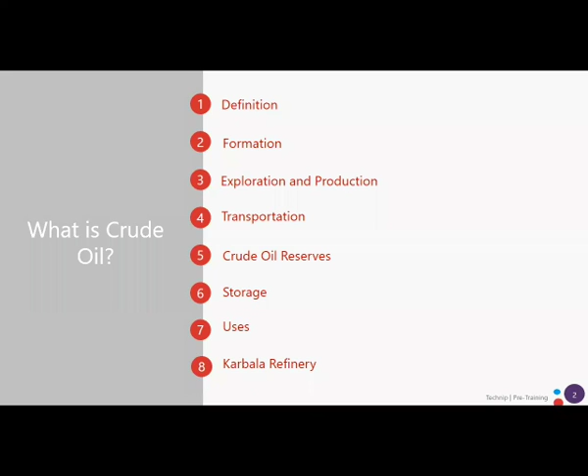Okay, let's start with the definition. Crude oil, commonly known as petroleum, is a liquid found within the earth comprised of hydrocarbons, other organic compounds, and small amounts of metal. The word petroleum comes from the Latin roots petra, meaning rock, and oleum, meaning oil. The crude oil hydrocarbons are mainly hydrogen, about 13% weight, and carbon, about 80%.

Other elements also found in crude oil make life more difficult for the refinery. These other elements are nitrogen, sulfur, oxygen, and metals such as iron, nickel, and copper, which can also be mixed in the hydrocarbons in small amounts.

As you know, organic compounds are those related with carbon and hydrogen, where carbon is present, covalently linked to other atoms.

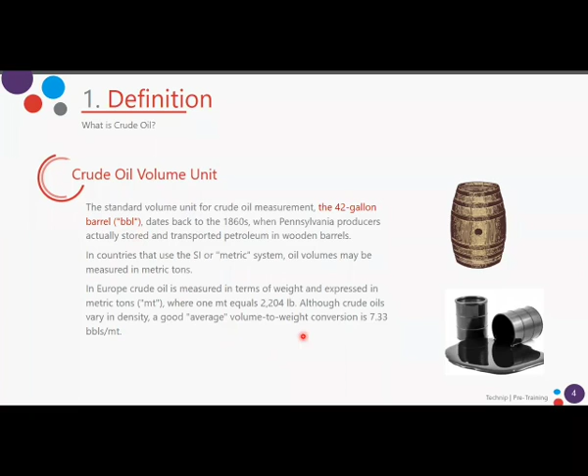Let's talk about some crude oil facts. Crude oil is a naturally occurring fossil fuel, meaning it comes from the remains of dead organisms. As we talked before, crude oil is made up of a mixture of hydrocarbons, hydrogen and carbon atoms. It exists in liquid form in underground reservoirs, in the tiny spaces within sedimentary rocks.

Of course, oil is cleaner than coal, but it also has some disadvantages, like the air pollution created in refining and transportation, and burning gasoline and other petroleum products releases CO2 that contributes to the greenhouse effect and increases global warming. We have also had, on many occasions, oil spills that can cause great environmental damage. So we have to be very aware of the environmental impact of crude oil transportation and refining.

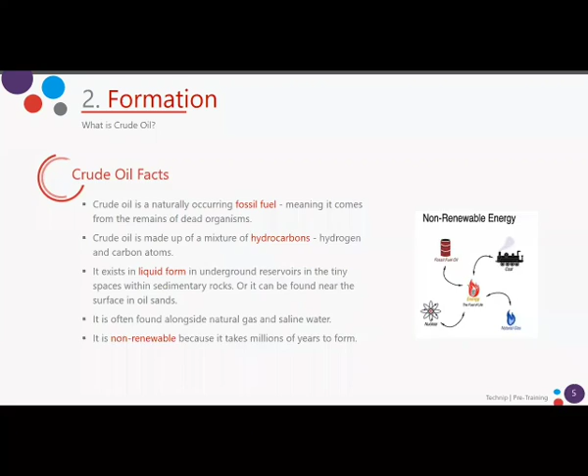How crude oil is formed.

Crude oil is formed from the remains of dead organisms, diatoms such as algae and zooplankton, that existed millions of years ago in a marine environment. These organisms were the dominant form of life on Earth at the time. As they lived, these organisms absorbed energy from the sun and stored it as carbon molecules within their bodies.

Once they died, their remains sank to the bottom of the ocean or riverbeds and were buried in layers of sand, mud, and rock. Over millions of years, the remains were buried deeper and deeper under more sediment and organic material.

The enormous pressure, high temperature, and lack of oxygen transformed the organic matter into a waxy substance called kerogen.

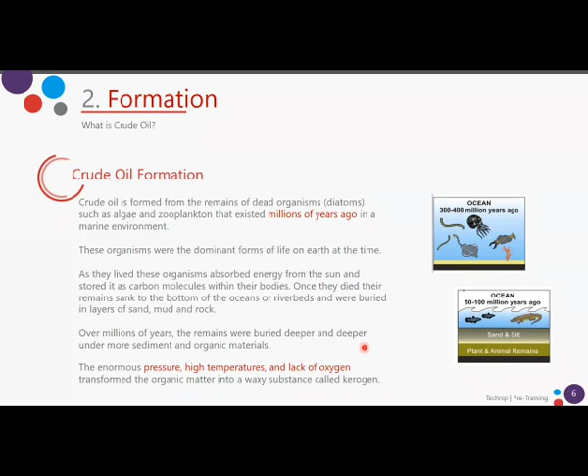With even more heat, pressure, and time, the kerogen, the component we saw in the previous slide, undergoes a process called catagenesis, which transforms the kerogen into hydrocarbons. Catagenesis is a term used in petroleum geology to describe the cracking process: you crack the molecules, resulting in the conversion of organic kerogen into hydrocarbon.

Different combinations of pressure, heat, and the original organic material will determine the type of hydrocarbon formed. In this case, the hydrocarbons form crude oil. If you apply more pressure and more heat, then you get more natural gas.

After the oil is formed, it moves through tiny pores in the surrounding rock from an area of high pressure to low pressure. That movement is often upwards, from the bottom to the top.

Some oil may make it all the way to the surface when it pools without restriction. But in other cases, the oil gets trapped under impermeable layers of rock or clay, where it forms an underground reservoir. So there can be a free path for the oil, or the oil can get trapped in underground reservoirs.

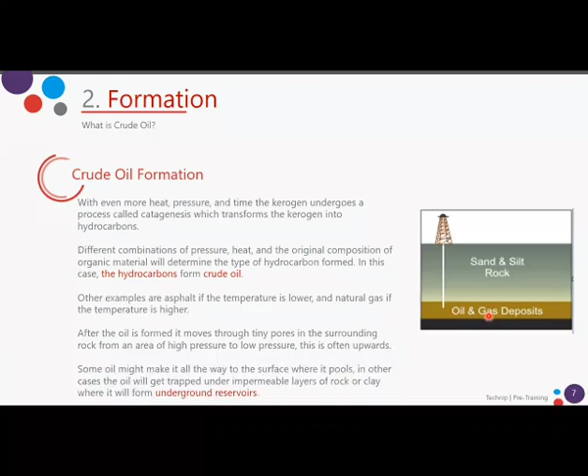So let's talk a little bit about exploration and production. Of course this is a complete subject, very specific, that requires a lot of study and understanding. We will give here some brief concepts of exploration and production.

The definition is that exploration and production is the early stage of energy production, which includes searching for and extracting oil and gas. In the oil and gas sector, this stage is referred to as upstream. Then we have the midstream and downstream sectors.

Land surveys are performed to locate specific minerals underground in order to estimate the amount of oil and gas reserved before drilling.

There are several processes involved, but one of the processes that can be used involves seismology. This process uses substantial vibration, as a result of machinery or explosives, to create seismic waves. Through these seismic waves, they can find the reservoir location.

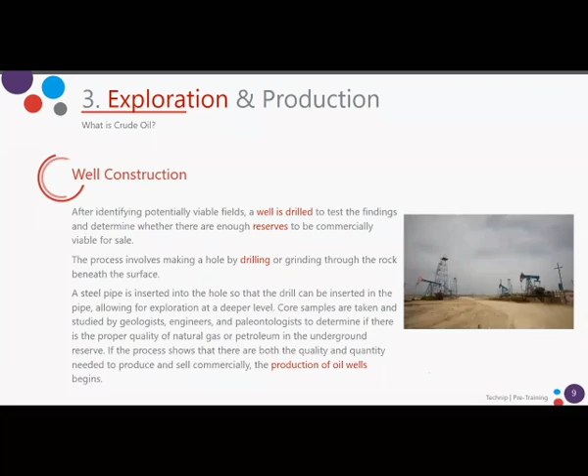How do they construct the well? Engineers will typically estimate how many wells will be needed and the best method of extraction. The estimated cost of the number of wells is determined. Next, the construction of the platform begins. This can be land or offshore.

The necessary environmental protections are also implemented at this stage. Through all these years, there have been significant advances in drilling technologies.

Companies can also drill horizontally, tapping into vertical wells to search for natural gas pockets, which can produce more natural gas than a typical vertical well.

Although they are very useful, horizontal drilling is about 3 times more expensive than vertical drilling. However, this extra cost is generally made up for with the increased well production. So depending on the crude oil price, companies will go to this more expensive process, that is the horizontal drilling.

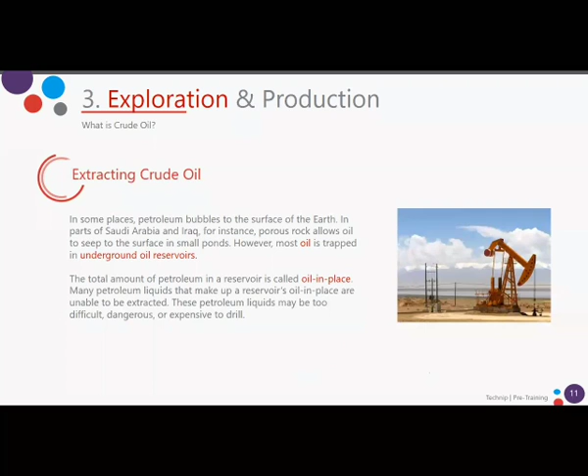The part of a reservoir's oil in place that can be extracted and refined is the oil reserve. So it's different from the oil in place.

The decision to invest in complex drilling operations is often made based on a site's proven oil reserve. So we can see that oil in place must not be confused with oil reserve. The oil reserve is the technically and economically recoverable portion of oil volume in the reservoir.

We will see in the next slides the recovery techniques that will be used to recover this oil in the underground reservoir.

On land, oil can be drilled with an apparatus called an oil rig or drilling rig. Offshore, oil is drilled from an oil platform. So first, a crude oil well is created by drilling a hole into the earth with an oil rig. A steel pipe is placed inside the oil well for structural strength.

Then holes are made at the bottom of the well so oil passes through the base. Collection valves are fitted at the top, and these valves maintain pressure when crude oil is pumped.

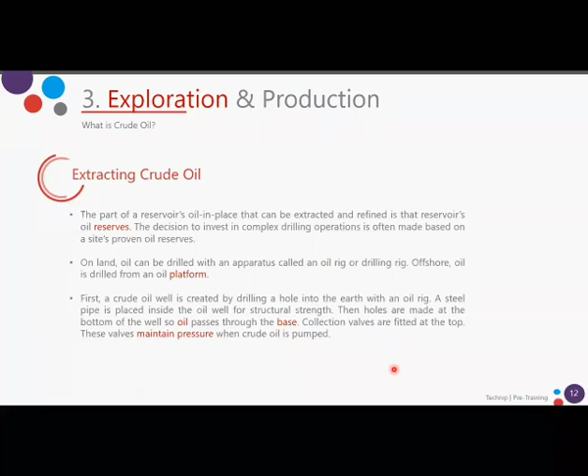So let's talk about the process for the recovery of the crude oil. We have mainly three: primary, secondary, and tertiary recovery. The primary recovery is the first stage of petroleum and gas production. The crude oil extraction from a new well relies on the natural rise of the oil due to the pressure differences between the oil field and the bottom hole of the well.

You can also use mechanical lift systems like a rod pump, which is also called primary recovery. In this stage, with primary recovery, you can get between 5 to 15% of the oil in the reservoir. So primary recovery is natural flow and also artificial lift, which is called pumps.

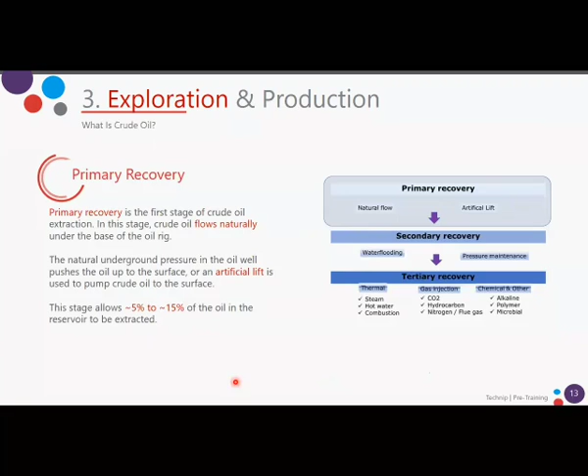The secondary recovery is used after we have recovered all the crude that we can with the primary recovery. So a secondary recovery will be used. How do we increase the natural flow of the oil? We can increase the natural flow by increasing the reservoir pressure. How do we increase the pressure? By injecting water or natural gas into the well. So this is what we call secondary recovery, to increase pressure with water or with natural gas.

How much crude can we recover in this secondary recovery? Up to between 35 to 45% of the oil in the reservoir. So secondary recovery is based on increasing the reservoir pressure.

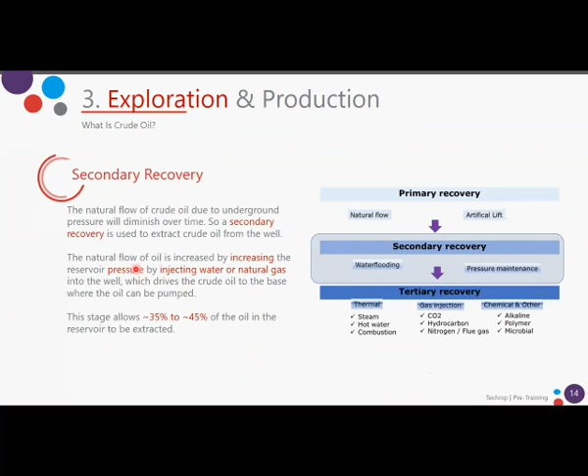What is a tertiary recovery? Tertiary recovery is applied when crude oil extraction from secondary recovery becomes impossible.

In this process, water, gas, and chemicals are injected into the reservoir to improve the natural flow of crude oil, and finally the crude oil is extracted. This stage allows an extra 5 to 15% of the oil in the reservoir to be extracted. Of course, tertiary recovery is more expensive than the other two processes, so when crude oil prices are high, this process can be used to increase oil extraction.

The primary purpose of this tertiary oil recovery is to reduce the oil viscosity. So we can go to this process of increasing or decreasing the viscosity with these processes.

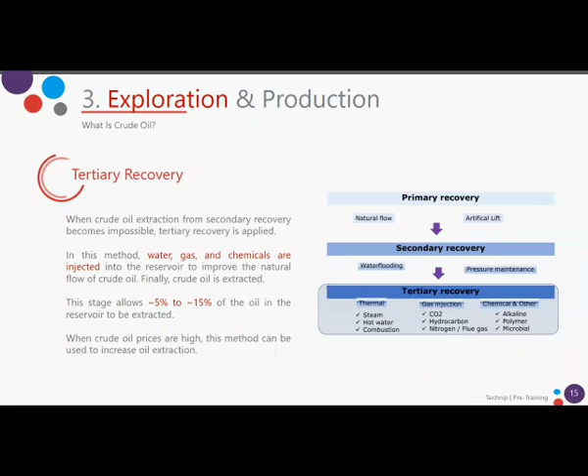The fluid that we get from the well is a combination of crude oil and natural gas. It is often mixed with water, non-hydrocarbon gases, and other impurities. The natural gas that we get along with the crude oil is called associated natural gas, because it comes with the oil.

The first step in processing this fluid is to route it to centralized surface handling facilities, where vessels are used to separate the oil, water, and gas into individual streams.

The water that we get is usually pumped back to the reservoir. If we cannot pump it back to the reservoir, we dispose of it in an environmentally friendly manner.

The oil that we get is measured and stored in tanks, then transported by pipeline or tank to the point of sale. The oil from the well is stored and then sent to refineries for further processing. The gas is treated or conditioned to remove water, vapor, and other impurities, and processed to recover gas liquids before being metered and sold.

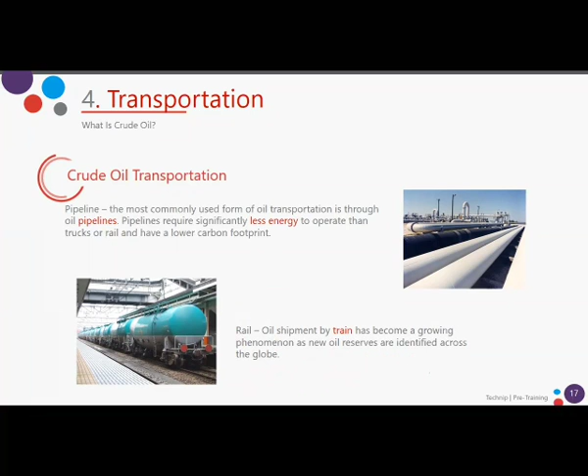Also, we can transport crude oil by truck, but this is limited by storage capacity. However, trucks have great flexibility in reaching all destinations.

But of course, the cheapest way to transport crude oil is by ship, where you can transport very large amounts. If we compare a barge, which is like a small tanker with 30,000 barrel capacity, it can carry the equivalent of 45 rail tanks at about one third the cost. So it is the most economical way to transport.

Nowadays, tankers can carry up to 2 million barrels of crude oil. If you multiply that by crude oil prices, they carry very expensive material inside each tank when transporting these very big quantities of crude oil.

So we have seen that we can transport crude oil in four ways: by pipeline, which is more used when transporting crude oil within a country or with neighboring countries; by train; by truck; or by ship.

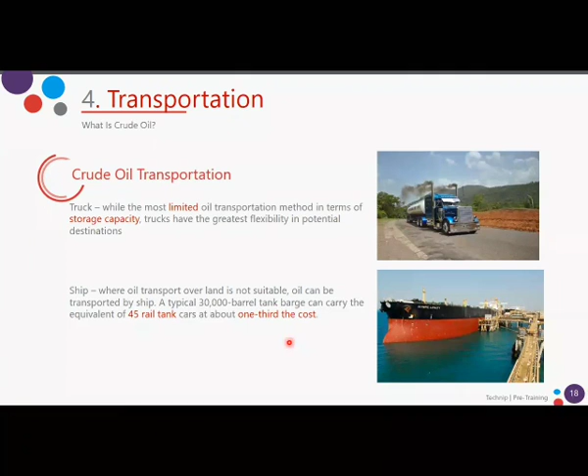Let's talk a little bit about crude oil reserves. For this, we have to talk about OPEC, the Organization of the Petroleum Exporting Countries. It was created at the Baghdad Conference in September 1960 by Iran, Iraq, Kuwait, Saudi Arabia, and Venezuela.

The mission of OPEC is to coordinate and unify the petroleum policies of its member countries and ensure the stabilization of oil markets in order to secure three things: an efficient, economic, and regular supply of petroleum to consumers; a steady income to producers; and a fair return on capital for those investing in the petroleum industry.

The crude oil reserves: all continents have oil and natural gas reserves, although they are very unevenly distributed. In the Middle East, there are huge oil fields with half of the world reserve. In the Gulf of Mexico, the North Sea, and in the Arctic, both Alaska and Russia, there are also large reserves.

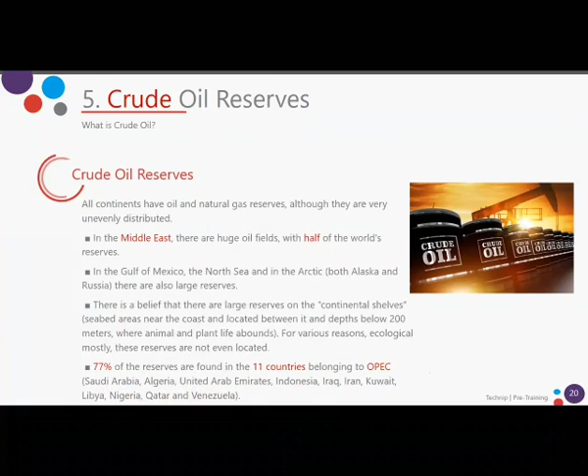Okay, so the oil reserve - remember that this is the amount of crude oil that can be technically recovered at a cost that is financially feasible at the present price of oil. That is different from the oil in place that we saw before, which is the total amount foreseen to be in the crude oil well that we are evaluating. So the reserves will change with the price.

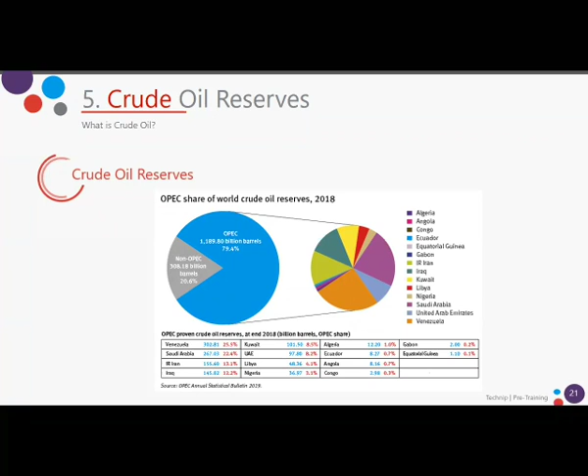Now we will see how do we store the crude oil. The crude oil, untreated and unrefined, is stored in tanks for shipment to other locations or processing into finished product.

There are four basic types of tanks used to store petroleum products. We have the floating roof tank used for crude oil, gasoline, and naphtha. Also we have the fixed roof tank that we use for diesel, kerosene, catalytic cracker feedstock, and residual fuel oil. The bullet tank used mainly for normal butane, propane, or propylene, and the spherical tank used for isobutane and normal butane.

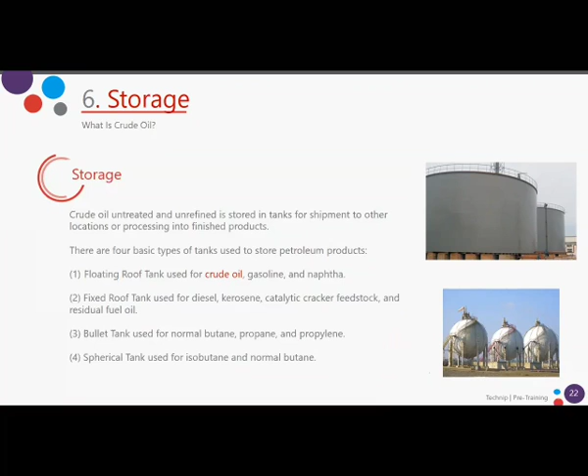How do we use the crude oil? To be used by us, the crude oil must be fractionated into its various hydrocarbons, and this is done at the refinery. Oil can be used in many different products because of its composition of many different hydrocarbons of different sizes, which are individually useful in different ways due to their different properties. So the purpose of a refinery is to separate and purify these different components.

Most refinery products can be grouped into three classes: the light distillates, that is naphtha and gasoline; the middle distillates, kerosene and diesel; and the heavy distillates, fuel oil, lubricating oil, waxes, and tar.

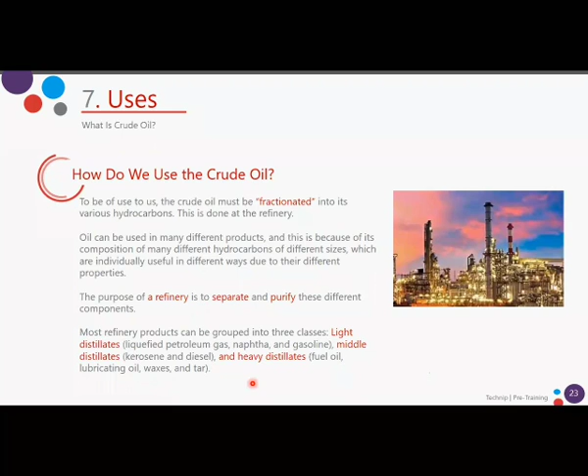How do we get from here to here? Through different processes. The main processes are the separation and the conversion, treatment, and then blending of the product to get the final product specification. How do we get all the processes? With the assistance of heat, pressure, catalysts, and additives.

During the next online sessions, we will see all the processes involved in the refinery. We will see the separation, mainly the crude oil distillation - the atmospheric and the vacuum distillation. Then we will see the conversion, where you have the isomerization, the catalytic reformer, the fluid catalytic cracking. So you have a lot of processes that we will see in the next session classes.

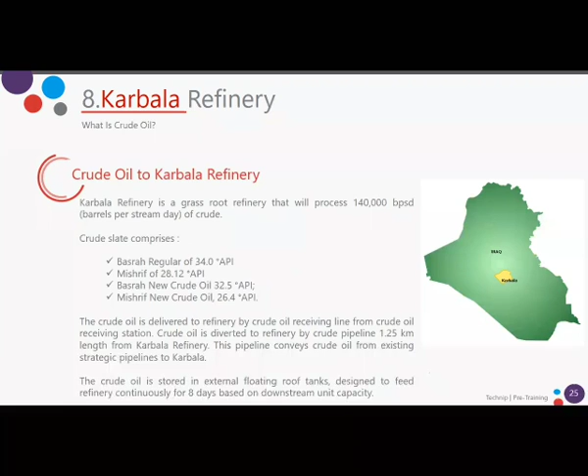Each refinery has a proper scheme depending on the products that you would like to get. In the case of the Karbala refinery, the production target is mainly transportation fuels for the Iraqi market. Also, some heavy fuel oil will be produced for the Al Khairat power station, and other products will be bitumen and solid sulfur.

The solid sulfur is because, as we saw in the second slide, the crude oil is composed mainly of hydrocarbons, but of course crude oil also contains some sulfur, and this sulfur has to be removed prior to going to a conversion process, and this is finally converted to solid sulfur.

The Karbala refinery configuration is comparable to a medium conversion scheme based on vacuum gas oil treatment and fluid catalytic cracking technologies, with the objective to obtain a significant conversion of heavy materials into desulfurized gasoline as secondary distillate. But as I told you, we will see later in different sessions all these process units, the main characteristics, and the feedstock and the products you will get from each process unit.

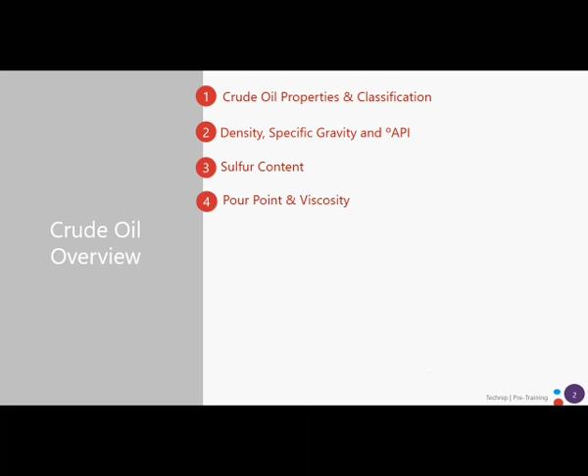So welcome again. Now we are going to go through the second presentation, the crude oil overview. In this presentation we will talk about crude oil properties and classification, density, specific gravity and degrees API, sulfur content, pour point and viscosity, basic sediment and water, ash content and carbon residue, total acid number, total nitrogen, and asphaltenes.

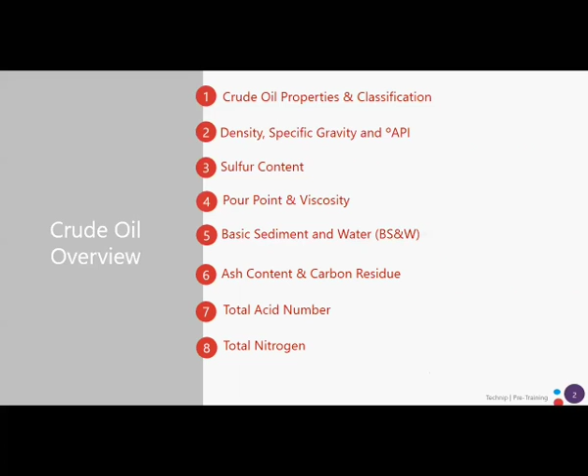It is important, if we are going to process crude oil, to understand its basic properties, the key raw material processed in the refinery. Crude oils are not the same, but vary in color, composition, and consistency. As we saw in the previous presentation, the Karbala refinery crude slate comprises four types of crude oil: two from Basra, one with 34 degrees API, and Basrah new crude with 32.5. We also have crude oil from Mishrif with 28.12, and a new crude oil with 26.4. Oil is classified according to three main categories: geographic location, API gravity, and sulfur content.

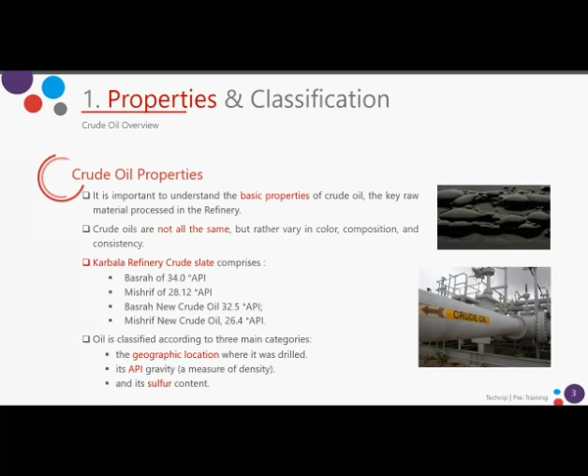So we will talk about many of these properties of crude oil. These are some of the basic properties of crude oil that will be treated in the Karbala refinery, which I took from the operating manual of the crude oil and vacuum distillation unit. So we will see the identification of the crude oils: specific gravity, API gravity, sulfur, pour point, basic sediment and water, ash content, asphaltenes, kinematic viscosity at two temperatures, total nitrogen, total acid number, and carbon residue.

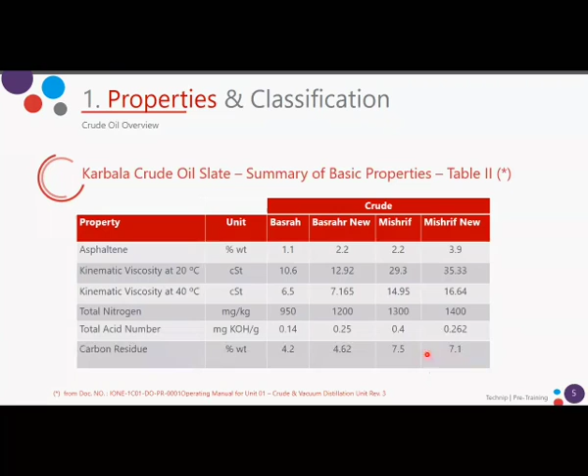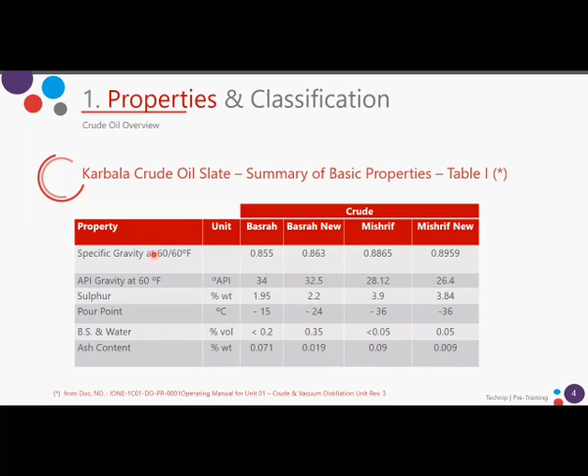You will have here the values for the four cases of crude oils to be processed in the refinery. Here you have the specific gravity for the four crude oils. The idea of this presentation is that we will go through all these properties to explain the concept of each one.

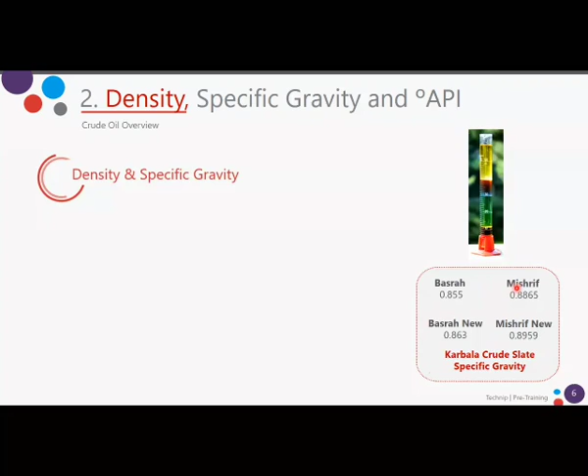So we will start with density and specific gravity. In this small square you will have the specific gravity for the crude oils to be treated in the refinery. The density is defined as mass per unit volume of a fluid and is shown by rho. The SI unit for density is kilogram per cubic meter. Liquid density decreases as temperature increases, but the effect of pressure on liquid density at moderate pressure is usually negligible, unlike in gases.

Two liquid density related properties of oils are often used: specific gravity and API gravity. What is specific gravity? It is an index used to measure the density of a liquid, calculated as a ratio — the density of the liquid divided by the density of water. Specific gravity, because it is a ratio of two equal dimension quantities, is a dimensionless quantity.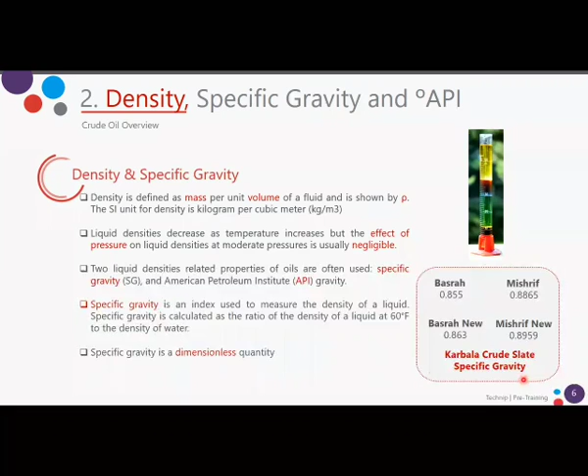You saw here the specific gravity is 0.855, without any dimension. Liquids with a density lower than water, which includes most crude oil grades and petroleum products, will have a specific gravity between 0 and 1. It is important to remember these concepts, because we will use specific gravity to calculate the API degrees. So remember, specific gravity is a ratio between the density of the crude oil, or any liquid, divided by the density of water at a reference temperature.

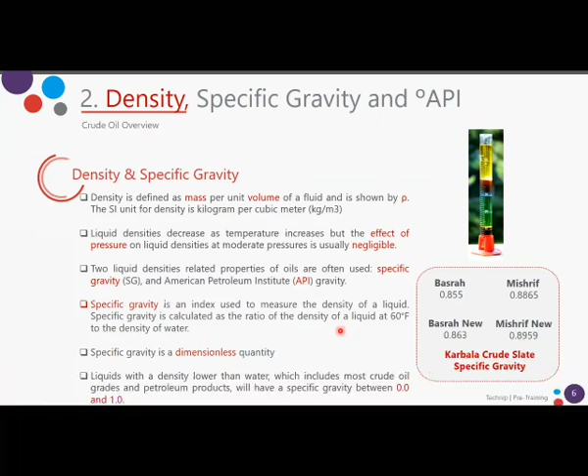So what is the API degrees? The American Petroleum Institute gravity, or API gravity, is a measure of how heavy or light a petroleum liquid is compared to water. If its API gravity is greater than 10, it is lighter and floats on water; if it's less than 10, it is heavier and sinks. API, the American Petroleum Institute, is a trade association of firms engaged in all aspects of the U.S. petroleum industry, including producers, refiners, marketers, and transporters.

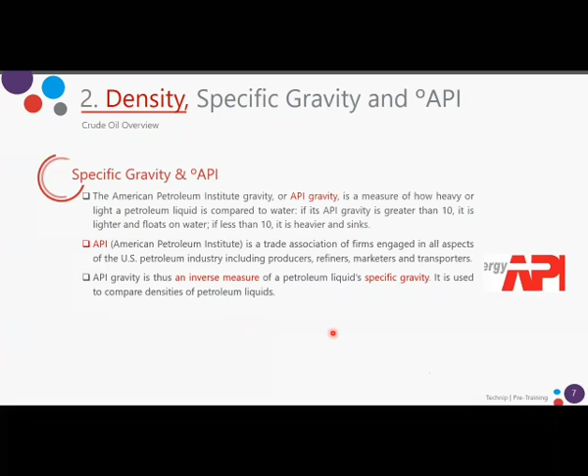API gravity is a little bit tricky because it's an inverse measure of the petroleum liquid specific gravity, and it is used to compare density of petroleum liquids. Although API gravity, as we will see in the formula, is mathematically a dimensionless quantity, it is often referred to as being in degrees.

So the formula to calculate the API gravity from a specific gravity is the following: 141.5 divided by the specific gravity, minus 131.5.

If we put here, for example, the specific gravity of water, that is 1, because it's the density divided by the density of water, that is 1, so we will get 10. So the API gravity of water would be 10: 141.5 minus 131.5.

As you can see, if you have a lower number here, you will have a higher number here, and this is a higher number. That's why it's the inverse. You have a low specific gravity, you have a higher API gravity. So oils with low densities, and hence low specific gravity, have high API gravity.

The price of a crude oil is usually based on its API gravity. With a high API gravity, that means you have a light crude oil, and it commands a higher price because it can produce a greater quantity of light products in the refining processes, and these light products have a higher price in the market. That's why a light crude oil will always be more expensive than a heavy crude oil.

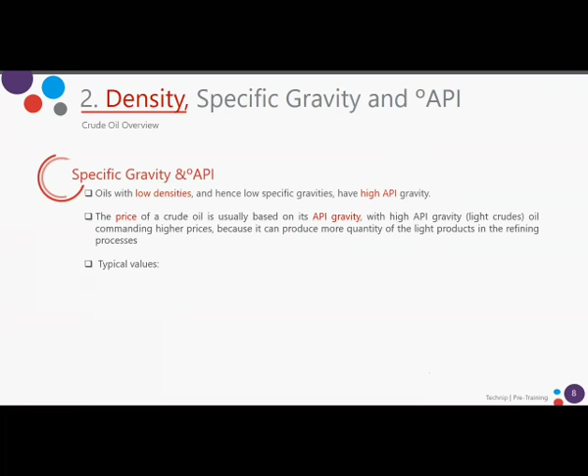Looking at typical values for different substances: water has a specific gravity of 1, giving an API gravity of 10 degrees. Gasoline usually has a specific gravity of 0.74, giving an API gravity of 60. For a light crude, the specific gravity is more or less 0.84, giving 36 degrees. But for a heavy crude, the specific gravity is 0.95, giving an API gravity of 18. So you will see that a light crude has a higher API gravity than a heavy crude, so for lower specific gravity, higher API gravities.

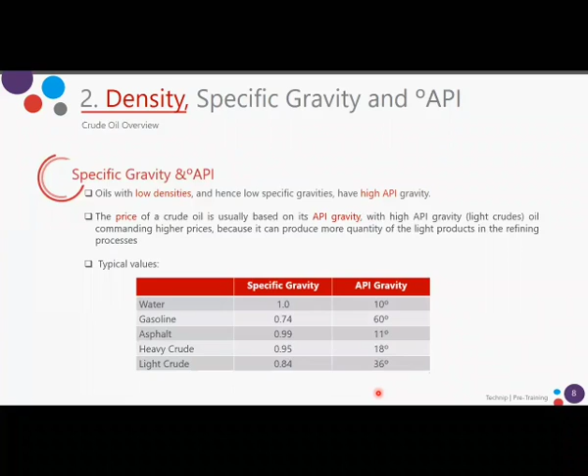The crude oils are classified according to the degrees API. Let's see how they are classified: they are light crude oil if the API gravity is higher than 31.1. They are medium oil if the API gravity is between 22.3 and 31.1. There are heavy crude oil if the API gravity is below 22.3, and extra heavy has a gravity below 10 degrees. Here we have the API for the crudes that will be treated in the refinery.

We have the Basrah crude with API degrees higher than 31.1, so it is classified as light crude oil. And we have the Mishrif crude oil where the API gravity is between 22 and 31.1, so it's classified as a medium crude oil. You will see here the classification in an arrow: light, medium, heavy, and extra heavy according to these values. So it is always good to remember that for light crude oil, the API gravity is higher than 31.1.

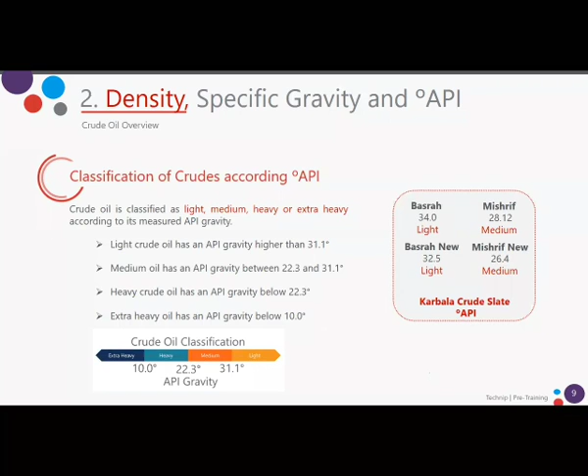Now we will see another very important element in the crude oil, that is sulfur. The sulfur content is quite important in the classification of crude oils. Why? Because it's not good in the crude oil, so we have to extract this sulfur because when burned, it will generate sulfur oxide. That's why it's an undesirable contaminant in the crude oil and in petroleum products.

When sulfur dioxide is created in the combustion of sulfur, and this sulfur dioxide combines with water and air, it forms sulfuric acid, which is the main component of acid rain. As you know, acid rain can cause deforestation, can acidify waterways to the detriment of aquatic life, and corrodes building materials and paints.

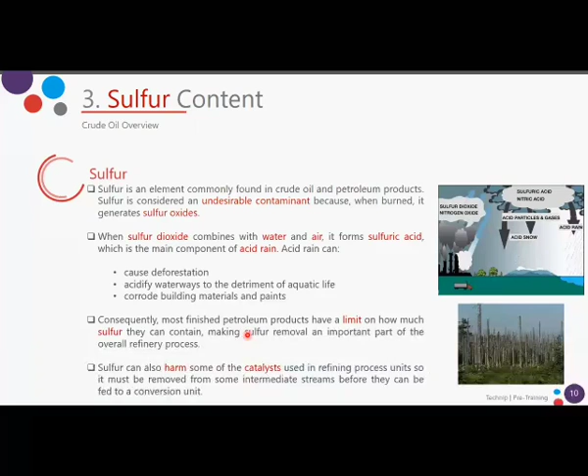How do we classify the crudes according to sulfur content? As we saw, sulfur in the crude oil is the second most important property next to the API. There are two terms to classify crude oil according to sulfur content: sweet and sour. These refer to the sulfur content of crude oil.

It seems that early prospectors would taste oil to determine its quality, and low sulfur oil actually tasted sweet. That's why they're classified as sweet and sour.

Using sulfur content to classify the crude, we say the crude is sweet if the sulfur content is less than 0.5% weight, and sour if the sulfur content is greater than 0.5% weight.

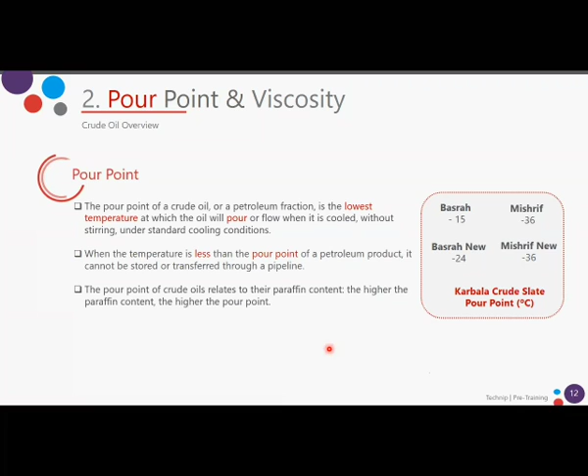Let's talk now about viscosity. The viscosity of a liquid is a measure of its resistance to flow. The viscosity symbol is mu. Water, gasoline, and other liquids that flow freely have a low viscosity.

Compared with honey, syrup, motor oil, and other liquids that don't flow freely, these have a high viscosity. The most commonly used unit for this dynamic or absolute viscosity is the centipoise.

The power requirement to transport a fluid depends strongly on viscosity. So how does viscosity vary with temperature? The viscosity of a liquid decreases with increasing temperature. But for gases, the viscosity increases with increasing temperature, unlike in liquids.

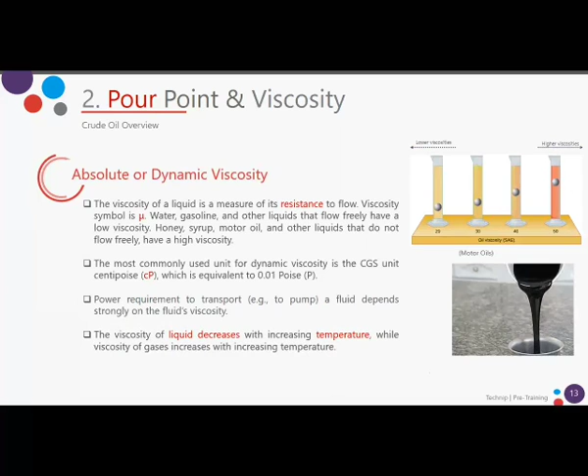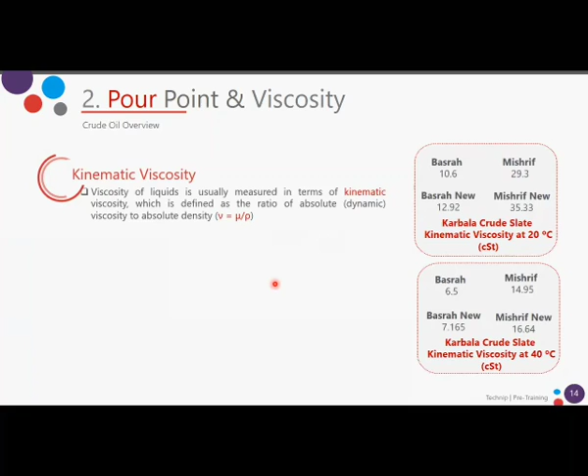So this is the dynamic viscosity, but we also see the viscosity expressed as the kinematic viscosity. The kinematic viscosity is usually the ratio between the absolute or dynamic viscosity that we saw in the previous slide divided by the density of the liquid. Often the unit used for the kinematic viscosity is the centistoke.

Usually, the values of the kinematic viscosity are reported at two reference temperatures. This measure of viscosity and kinematic viscosity are used frequently in engineering, fluid dynamics, and for practical applications.

Okay, I will raise my voice. Okay.

This measure of viscosity and kinematic viscosity is used frequently in engineering fluid dynamics and has very practical applications through pipelines. When you calculate the pipeline, this is common data you will have to use: the viscosity will tell you also the pressure drop across the pipelines.

Here you will see the kinematic viscosity for the crudes in the refinery. As you can see, they are referred to two temperatures, at 20 degrees and at 40 degrees, in centistoke, as we saw previously, which is a common unit used. What can you see here about this kinematic viscosity at two temperatures?

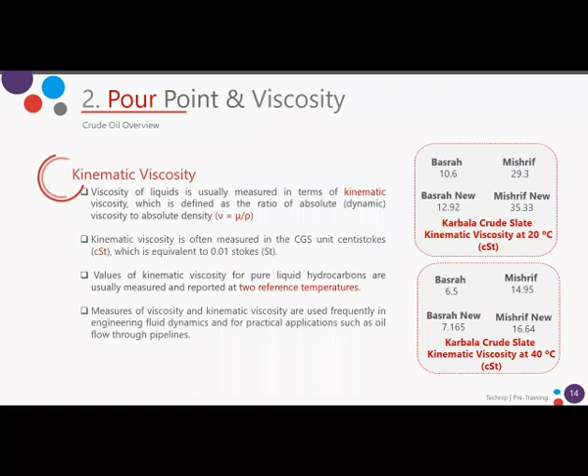Another important property of the crude oil is the basic sediment and water, BS&W. The amount of water, salts, and sediment in the crude oil as received at the petroleum refinery varies widely with the source of the crude oil, the prior processing of the crude oil at the source sites, and with the mode of transporting the crude oil from its source.

The bulk of the water and sediment is usually separated at the field, because they don't want to transport water to the refinery, to minimize the quantity that needs to be transported further. The residual content of this unwanted impurity is measured as BSW, that's basic sediment and water.

Crude oil at the refinery requires desalting to minimize fouling and corrosion caused by salt deposition on heat transfer surfaces and acid formed by the decomposition of the chloride salts, and to remove suspended solids from the crude oil itself.

We will see in the next online session, next week, when we talk about crude oil distillation, this first section of the unit, which is the desalting of the crude oil. That is accomplished before the crude oil distillation, and in this first section we will remove all these, especially the chloride salts present in the crude oil. So it is quite important in the refinery, this first process.

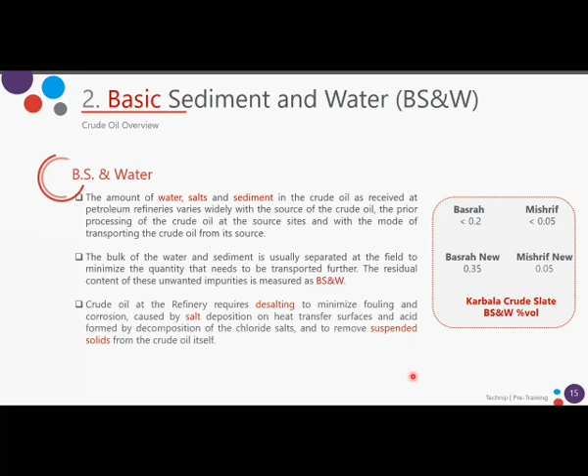Another important property of the crude oil is the ash content. The ash content represents the incombustible component remaining after a sample of the furnace oil is completely burned. The ash content in the crude oil is an indication of its metallic constituents. The ash left after completely burning an oil sample consists of stable metallic salts, metal oxides, and silicon oxides. So it will give you an indication of the metal contents in the crude oil.

Some of the ash forming constituents occur naturally in the crude oil. Others are present as a result of refining or contamination during storage or distribution. So we can have metals in the crude oil, or they can also be picked up in the storage tanks.

The presence of ash in the crude oil, which is an indirect measurement of the metal content in the crude oil, is unfavorable because these metallic compounds cause corrosion and poison the catalyst that we will use in the refinery processes. The higher the ash content is, the higher the tendency of the crude oil to form sludge or sediment. So this ash content is also quite important.

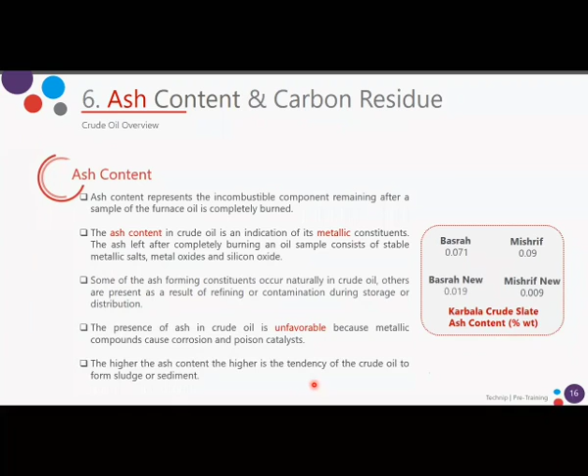Now we will see the carbon residue. The carbon residue, for a fossil fuel, can be defined as the tendency to form carbon deposits, in this case at high temperature in an inert atmosphere.

Carbon residue for a fuel is measured in weight percentage, or parts per million by weight, milligrams per kilogram. Carbon residue relates to the asphalt content of oil and indicates the tendency of fouling in heated tubes and catalyst deactivation. The ash-forming constituents are also part of this total carbon residue.

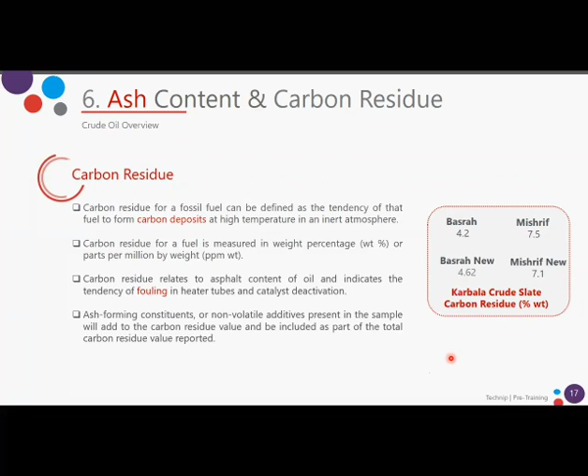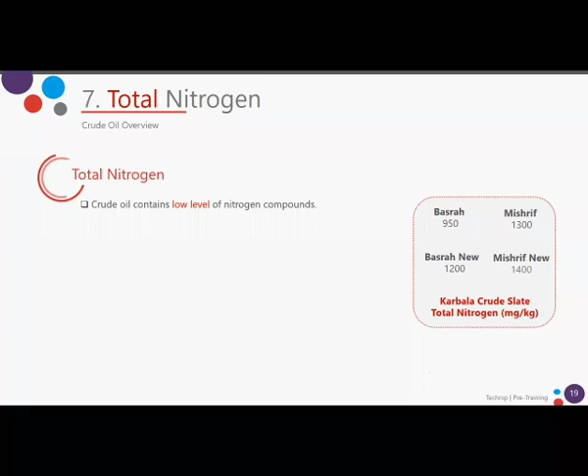Another important parameter to evaluate in the crude oil is the total nitrogen. Normally the crude oil contains a low level of nitrogen compounds compared to the sulfur compounds. We are talking about milligrams per kilogram, so we are talking about ppm.

A high nitrogen content is undesirable because nitrogen compounds can cause severe poisoning of the catalyst used in the refinery. You have seen that catalysts are referred to in all these processes because we have a lot of catalysts in the refinery and they are quite expensive, so we have to take care of them. The nitrogen compounds can also cause corrosion problems, hydrogen blistering, and gum formation in refinery products.

This hydrogen blistering refers to the formation of surface planar cavities called hydrogen blisters in a metal. These result from excessive internal high hydrogen pressure, and this is caused by nitrogen compounds.

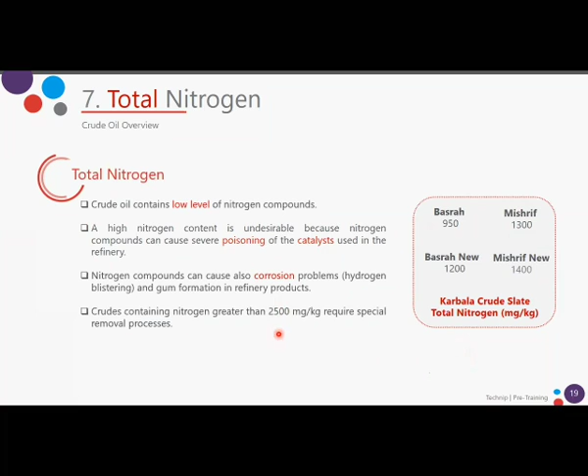Crudes containing nitrogen greater than 2,500 milligrams per kilogram require a special removal process. In our case, the content of nitrogen in the crude oils that will be processed in the Karbala refinery is lower than 2,500.

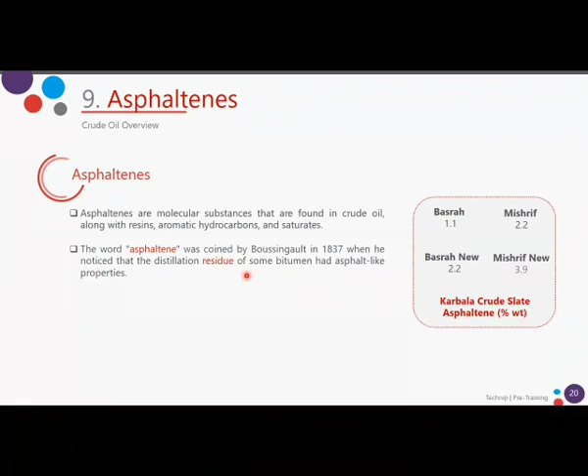Now we will talk about the asphaltenes. The asphaltenes are molecular substances that are found in the crude oil along with resins, aromatic hydrocarbons, and saturates. The word asphaltene was coined by Boussingault in 1837 when he noticed that the distillation residue of some bitumen had asphalt-like properties.

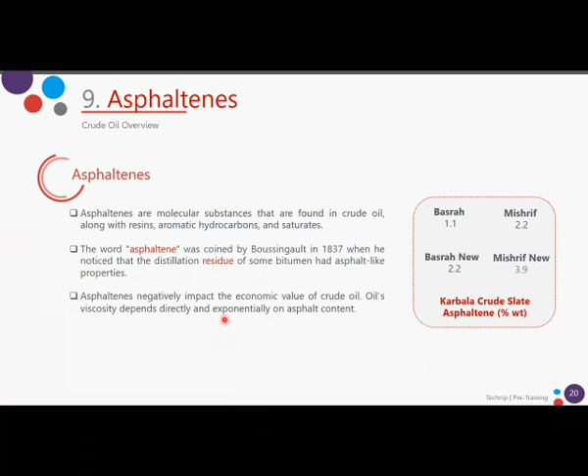The asphaltenes negatively impact the economic value of the crude oil. An oil's viscosity depends directly and exponentially on asphaltene content. I can tell you the asphaltene is a very complicated molecule, a complex structure.

They consist of hydrogen, carbon, nitrogen, oxygen, and sulfur, and these are polynuclear aromatic structures consisting of 20 or more aromatic rings, along with paraffinic or naphthenic chains.

As asphaltene content increases, the viscosity and density also increase. The asphaltenes are known to be one of the largest causes of fouling in the heat exchangers of the crude oil distillation preheat train.

We will see in the next session this preheat train and the importance of the preheat train in the refinery for lower energy consumption. So this is the last slide for this presentation. If you have any question, otherwise we will move to the last presentation, called hydrocarbons.

Okay, so now we will start our last presentation for today, that is hydrocarbons. I'm sure many of the concepts will be very familiar to you, but we'll make a refreshment of these concepts. In this presentation we will see the hydrocarbon definition, we will talk about the carbon atom, the hydrocarbons classification, the hydrocarbons in crude oil, and some examples of non-hydrocarbon compounds.

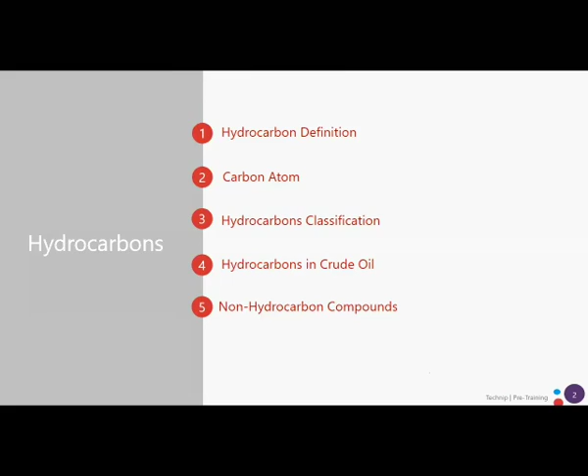Definition: hydrocarbons are the simplest of all organic compounds, containing only carbon and hydrogen. The carbon atoms join together to form the framework of the compound, and the hydrogen atoms attach to them in many different configurations. Hydrocarbons are the principal constituents of crude oil and natural gas. They serve as fuels and lubricants, as well as raw material for the production of plastics, fibers, rubbers, solvents, explosives, and industrial chemicals.

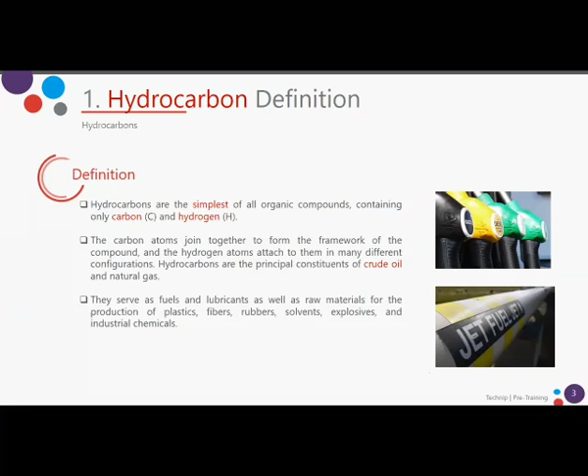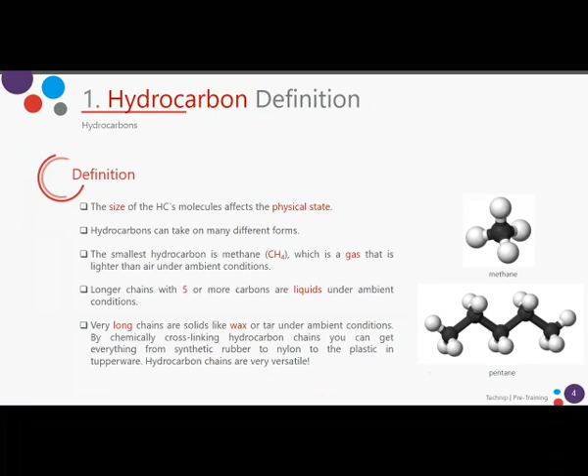It's quite important to know the definition of hydrocarbons, because from hydrocarbons there is a huge industry behind them. So let's talk about carbon, the king of organic chemistry. The carbon atom is unique among elements in its tendency to form extensive networks of covalent bonds, not only with other elements, but also with itself.

As you saw the other day when you talked about the periodic table, carbon is neither an electropositive nor an electronegative element, so it's more likely to share electrons than to gain or lose them. That's the tendency to form covalent bonds. The carbon-hydrogen bond, the CH bond, is a covalent bond, meaning carbon shares its outer valence electrons with up to 4 hydrogen atoms. This completes both of their outer shells, making them stable.

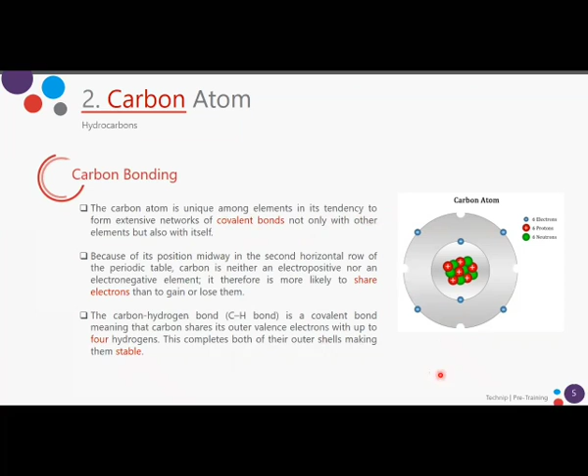How are hydrocarbons classified? Hydrocarbons are classified into alkanes, alkenes, alkynes, and aromatics. We will see each of these groups here.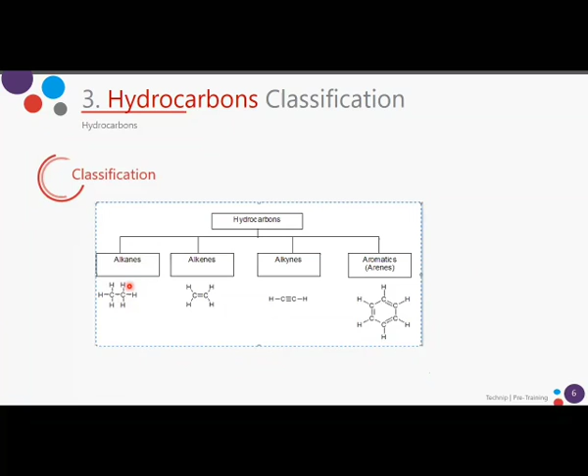The alkanes are the saturated hydrocarbons. Saturated hydrocarbons are the simplest of the hydrocarbon species. As I told you before, these alkanes are also known as paraffins. They are composed entirely of single bonds and are saturated with hydrogen. The formula for acyclic saturated hydrocarbons is CnH2n plus 2.

These saturated hydrocarbons are the basis of petroleum fuels and are found as either linear or branched species. Hydrocarbons with the same molecular formula but different structural formula are called structural isomers.

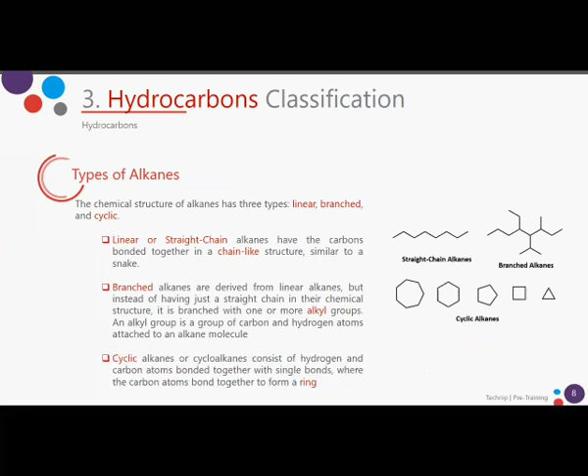So we'll see methane, we don't have isomers, we don't have another way to put the 1 carbon and 4 hydrogens, neither with ethane, that is C2H6. We have propane with its 3 carbons and 8 hydrogens. We have butane with 4 carbons and 10 hydrogens. We have pentane with 5 carbons and 12 hydrogens.

As you can see, from butane you can have another way to arrange these 4 carbons and 10 hydrogens, so you have 2 possible isomers. For the pentane, you will have 3 possible isomers. For the hexane, that has 6 carbons and 14 hydrogens, you have 5 possible ways.

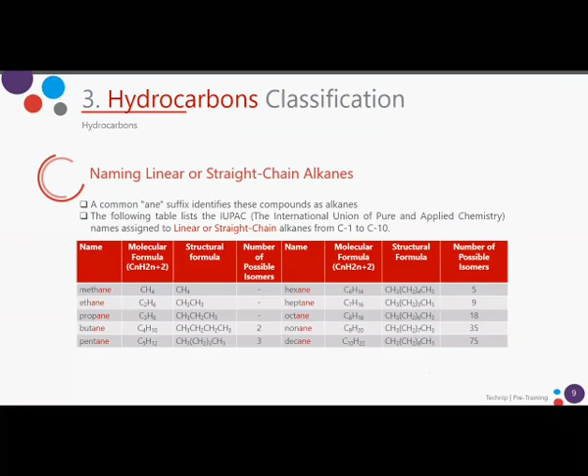So the alkyl groups that we saw before with the branched alkanes are named in this way. From the methane, you replace the '-ane' suffix by '-yl'. So methane will be methyl, of course with 1 hydrogen less than the methane, which will be attached to another atom of carbon or another compound. From the ethane will be ethyl, that is C2H5.

From propane will be propyl, that is CH3-CH2-CH2. And from butane will be butyl, CH3-CH2-CH2-CH2. You will see also this R, that is like a generic unspecified alkyl group. You will see, for example, when this R is attached to a sulfur, it means that it's a sulfur attached with any kind of alkyl group.

Okay, so this is a way to name the branch alkanes using these alkyl groups, naming from the alkanes, the corresponding alkane. So there is a rule. There are rules to name the branch alkanes.

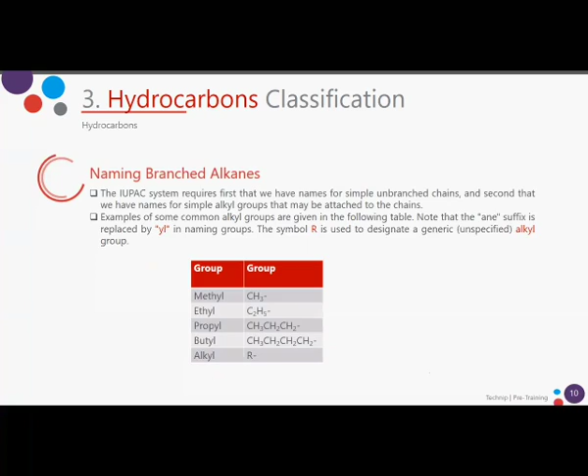So the IUPAC, that is the International Union of Pure and Applied Chemistry, has these rules to name the branch alkane. First, we have to find and name the longest continuous carbon chain. Then identify and name the groups attached to this chain.

Then number the chain consecutively, starting at the end nearest a substituent group. Designate the location of each substituent group by an appropriate number or name. Assemble the name listing groups in alphabetic order using the full name. The prefixes di, tri, tetra, etc., used to designate several groups of the same kind, are not considered when alphabetizing.

These are the rules by the IUPAC, but as organic chemistry grew and developed, many compounds were given trivial names, which are now commonly used and recognized. We will see some examples in the next slides that don't follow exactly the IUPAC rules.

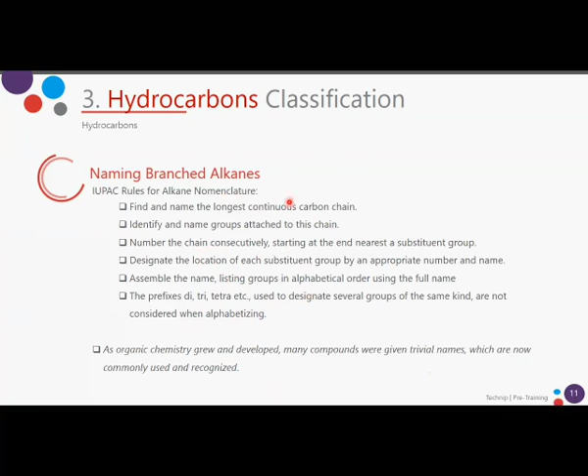So we will see an example for the isomers. Let's take as an example pentane, that is C5H12. We put the 5 carbon atoms in a row, then we fill with hydrogen so each carbon has 4 bonds. So we have here the pentane, that is C5H12.

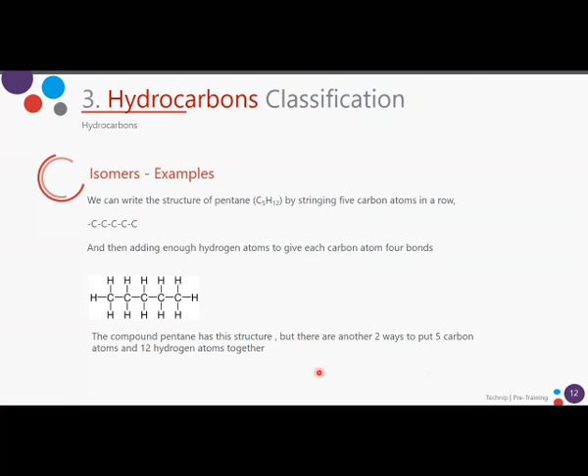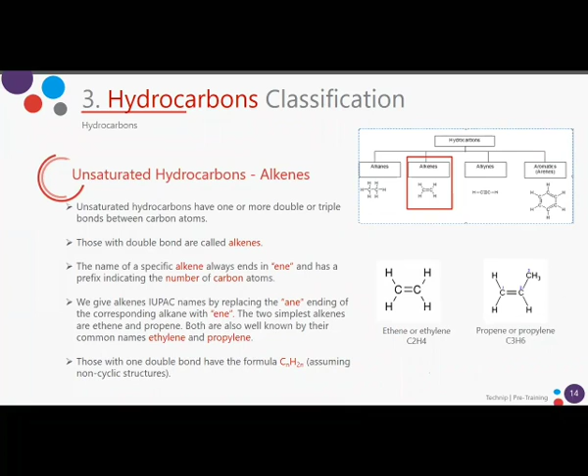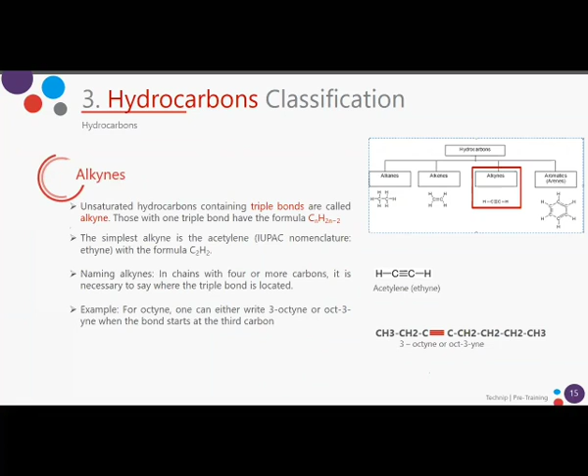Let's move to the following slide where we will talk about aromatics. Aromatics are also known as arenes, hydrocarbons that have at least one aromatic ring. They are called aromatic initially because of their fragrance. I'm sure if you have been in the chemistry lab, you know benzene smells like almonds. Benzene, C6H6, is the best known aromatic compound, and is like the parent to which numerous other aromatic compounds are related.

The 6 carbons of benzene are joined in a ring, having the planar geometry of a regular hexagon in which all the C-C bond distances are equal. As we saw before, you must not confuse aromatics with cycloalkanes. Here you can see the double bonds, but in cycloalkanes there are no double bonds. So this is benzene.

The largest group of aromatic compounds are those in which one or more of the hydrogens of benzene are replaced by some other atom or group, like methylbenzene, best known as toluene, or dimethylbenzene, known as xylene. Okay, so let's stop here. This is benzene, C6H6.

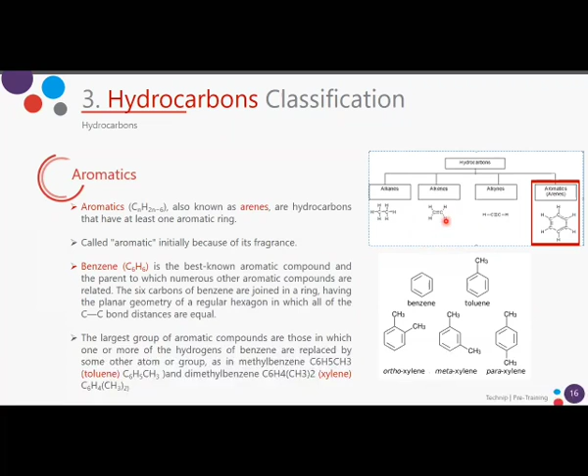But we'll find them in some of the processes in the refinery. The hydrocarbons in crude oil, as we saw before, are very wide and complex mixtures. Given the impossibility and uselessness of identifying the enormous amount of different hydrocarbons in crude oil, they are usually grouped into the following families.

So we'll see the paraffins that we saw at the beginning of the presentation. Paraffins are the straight chain or branched alkanes, quite important because they're the most important constituent of crude oil.

We also have the naphthenes or cycloparaffins in crude oils, which are alkane cycles, mainly cyclopentane and cyclohexane. They are quite important constituents of crude oil. And we saw the aromatics, the aromatic rings. So these are the three most important families we can find in crude oil.

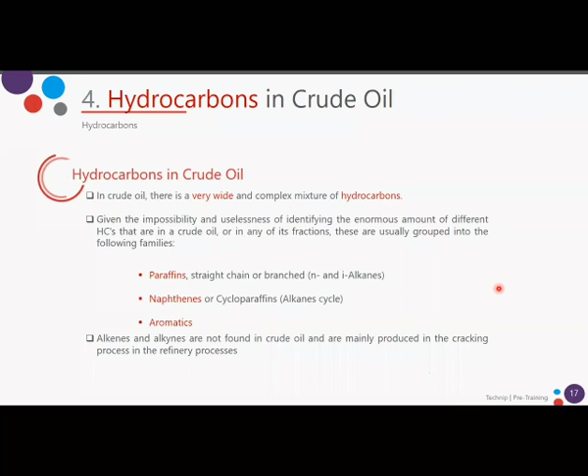So the last slide in this presentation, just a few examples of other organic compounds. These are organic compounds, not hydrocarbons, but some of the hydrogens have been replaced by other atoms such as oxygen, nitrogen, phosphorus, or halogens. For example, sugar.

It's a compound of carbon, hydrogen, and oxygen. We also have proteins, which besides carbon and hydrogen, also have oxygen and nitrogen. And we have here tetrachloromethane.

So this is a review of hydrocarbons, a very quick review, but we have covered the main concepts of hydrocarbon classification. So if you have any question, you can put it in the chat, or Ahmed will revert to me.